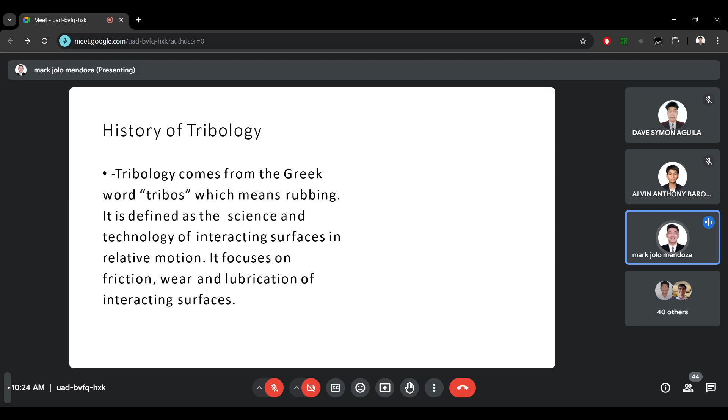First, the history of tribology. It comes from the Greek word tribos, which means rubbing, and this is defined as the science and technology of interacting surfaces in relative motion. Basically, tribology revolves around lubrication, because lubrication tends to ease the interacting surfaces of different machine parts or machine elements. It also focuses on friction and wear, since we are talking about interacting surfaces, or those surfaces that have contact with each other, so we are going to be giving focus on that.

So here, I'm just going to give you some hints. You need to remember at least five persons that are going to be discussed here in the history, so that you can easily have points on the midterm examination. Just take note of that.

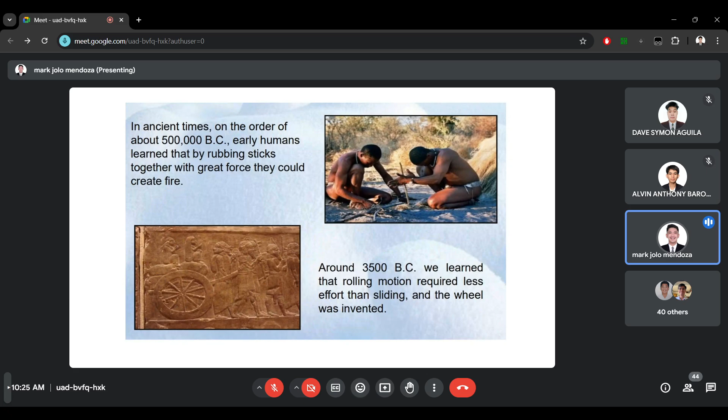For the history, we are all familiar that early humans were rubbing sticks together, and with that they could create fire. Then around 3500 BC, the wheel was invented, because they had learned that rolling motion required less effort than sliding, since there is a lesser surface in contact with another surface. That's the reason why rolling required less effort than sliding—it's easier to move or create motion through rolling rather than sliding.

Next, in 1495, Leonardo formulated the two basic laws of friction, wherein it is independent of contact area and proportional to load. But during that time, he was not credited for his work since he did not publish any of his observations, until Guillaume Amontons rediscovered these laws. According to him, friction was primarily the result of work done to lift one surface over the roughness of the other, thus resulting in deformation and wear of the surfaces.

And Isaac Newton added that moving friction was not dependent on speed or velocity, thus formulating the third law of friction. So, all of this remained in the macro scale.

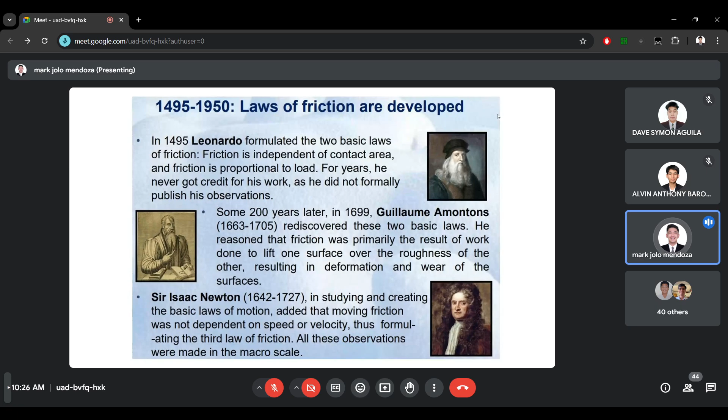Then in 1950, Phillip Bowden and David Tabor gave a physical explanation for the observed laws of friction. It was found that the area of contact is a very small percentage of the apparent area. As the normal force increases, more asperities come into contact and the average area of each asperity contact grows. This becomes the foundation of the formula of friction we use today.

Is anyone from the section able to answer? Does anyone know the formula of friction? This has already been discussed with you. So, anyone, what's the formula for friction that we commonly use for the frictional force? Anyone?

Yes, engineer. Sir, coefficient of friction times normal force po. Yeah, that's right, thank you.

So the frictional force F is equal to the coefficient of friction times the normal force. Like what was found out by Bowden and Tabor, when we increase the normal force, the frictional force would also increase.

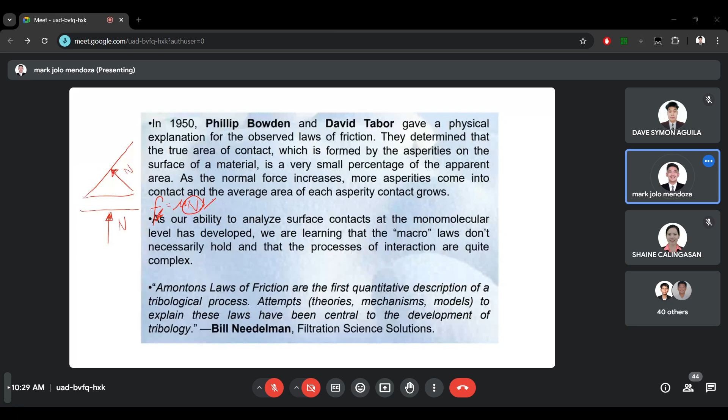In 1883, the elucidation of hydrodynamic lubrication began in England with testing done by Beauchamp Tower. We are going to be tackling more about hydrodynamic and hydrostatic lubrication after our midterm examination.

I just want to give you a heads up, even though the formulas that we're going to be using in calculating or designing lubrication systems are quite long, I could tell you it is quite easy as well because you are just going to be doing simple substitution. If you already established the given parameters, you could easily solve or design the lubrication system.

And lastly, in his final phase of research, he drilled an oil feed hole in the bearing. The oil was found to rise upwards in the feed hole and leak over the top of the bearing cap. He then installed a pressure gauge and found it to be inadequate for measuring the high pressure levels. This result proved the existence of a fluid film that could carry significant loads, which would be discussed mostly.

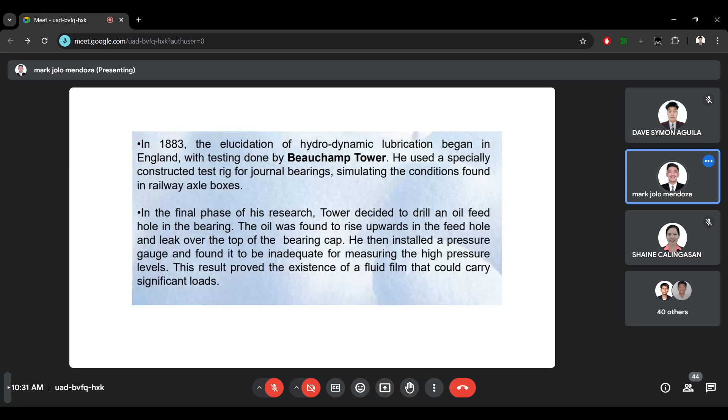Then in 1886, Osborne Reynolds published a differential equation describing the pressure buildup of the oil in the narrow converging gap between journal bearing surfaces. It was so complex that many years passed before it was solved for journal bearings.

Then Richard Stribeck published the Stribeck curve, a plot of friction as it relates to viscosity, speed, and load. After the work of Tower and Reynolds, Arnold Sommerfeld refined the work into a formal theory of hydrodynamic lubrication. So we are going to be discussing the Sommerfeld number, the Stribeck curve, and the Reynolds number on topic 4, in determining the design parameters or the performance variables of bearings. So yeah, hold on for a moment.

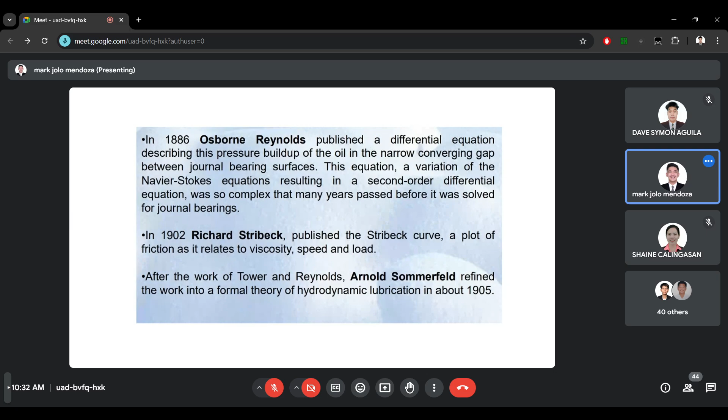So next, that's the history. That is some of the notable findings regarding tribology. So next, we are going to be discussing friction.

I am confident that you already know the idea of friction, which is the force that hinders or resists the relative motion of two contacting bodies. So basically, friction occurs when there are two surfaces that are in contact with each other.

Unless stated otherwise, the surface is assumed to be a smooth surface with no friction on the surfaces. But in real life applications, there is no such thing as a frictionless surface. But for the analysis and calculations, some problems state to neglect friction and assume that the surfaces are smooth.

So it originates from complex molecular and mechanical interactions between contacting surfaces. Friction causes wear and generates heat, which can lead to premature failure of the functioning implants.

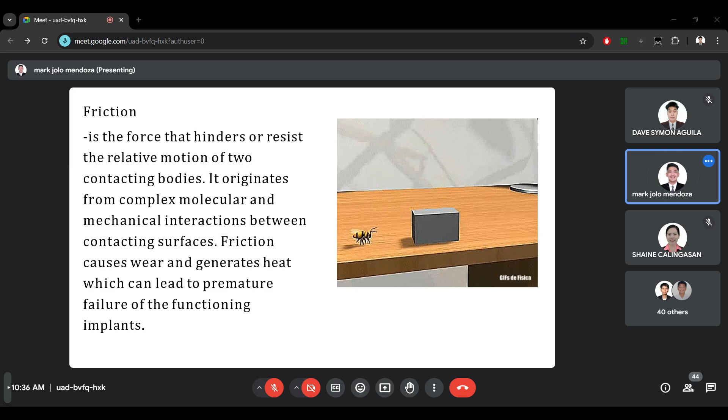So, like what has been stated by one of our masters here, friction is commonly represented by the coefficient of friction, assigned as mu. The coefficient of friction is a unitless ratio.

So we're here with our stated equation. F represents the frictional force, and it is equal to the coefficient of static friction times the normal load or the normal force N, or here it is assigned as P.

So it just depends, this one and this one are the same. It just depends on how you assign variables to the parameters given. But basically, we commonly use N since it is a normal force. So we assign normal force usually as N, and letter P usually is assigned to applied force. But again, it really depends on how you assign variables to the parameters, as long as you state that in your assumptions or in your analysis, then it would be good.

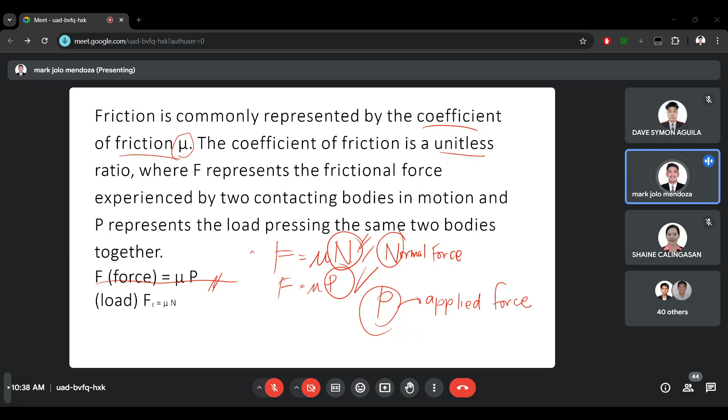So next we're going to be discussing static friction. It is the friction present between two or more objects that are not moving with respect to each other. Basically, it says static, meaning an object is at rest, or it is not moving relative to each other.

Since it is not yet moving, since it is not still in motion, then it would require a greater force to move the object, and also the static friction, or the magnitude of the static friction, is greater due to the greater value of its coefficient. So it just means that when it is stationary, if you want to move that stationary object, you would need to exert a greater force because of a higher static friction.

So the equation to represent that is given by the static force equals its coefficient times the normal force. Whereas for the kinetic friction, opposite of the static friction, it is the friction present between two or more objects that are already in motion.

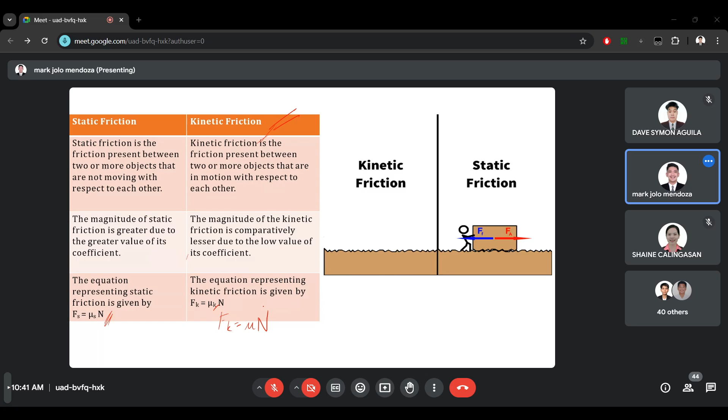Other examples are rolling friction. From the word itself, rolling, it rolls on the surface, and this friction occurs between the surface in contact with the rolling object and the surface. Its coefficient is dependent on the radius of the rolling object, the depth to which the object can sink, and the toughness of the surface.

So its formula is still the same. It's just that it is expressed through the rolling friction. So rolling friction is equal to the coefficient times the normal force.

And lastly, the sliding friction, it takes place when two surfaces are rubbed against each other. So also from the word itself, sliding, it means two objects are sliding past each other. One common example of this are those elements or machine parts that have shearing stress, wherein, for example, one plate and this plate are sliding past each other. There would be this sliding friction, and there would also be a shear stress present.

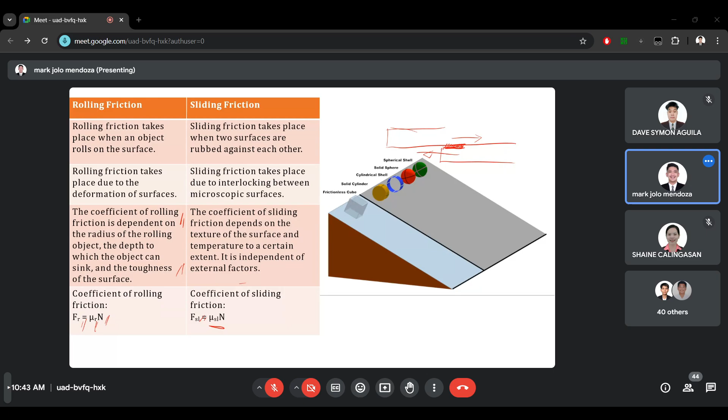So wear, you're already familiar with this, it is a process of removal of material from one or both solid surfaces in solid state contact, occurring when these two solid surfaces are in sliding or rolling motion together. It is the progressive damage involving material loss which occurs on the surface of a component as a result of its motion relative to the adjacent working parts.

Again, you're already familiar with wear, it occurs when there are two contacting surfaces that are sliding or rolling past each other. One great example of this is when you are sanding using a sandpaper, which is a rough surface. For example, you are sanding a wood or plywood. It creates a smoother surface, but there is material loss present because the surface is becoming worn out.

Also great examples of this are the chain and sprocket, and bearing and shaft. During the process, it would create wear since the shaft is rotating and being guided by the bearing. They have these contacting surfaces, so it creates wear, and if not designed properly, it could cause failure of the members of the machine parts.

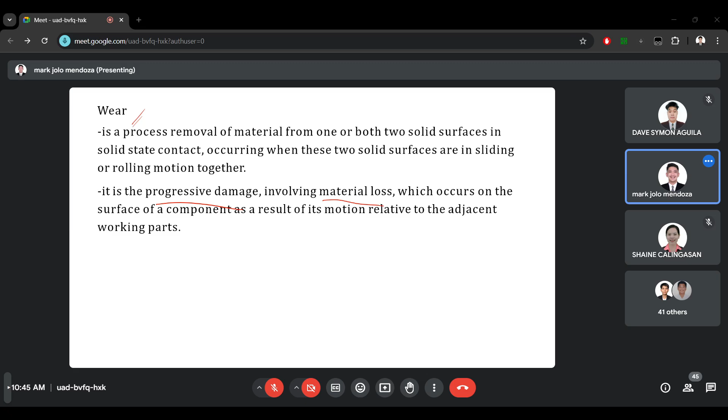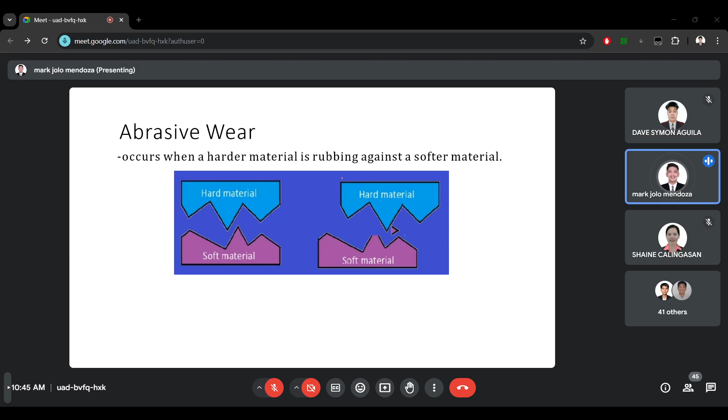An example or one type of wear is abrasive wear. It involves abrasion, wherein it occurs when a harder material is rubbing against a softer material.

Next is erosive wear, wherein it is the impingement of solid particles or small drops of liquid or gas on a solid surface that causes wear. One great example of this is dropping a hard or rough stone on a smooth table surface. When it gets dropped, you could see there is a deformation on the surface of the table, and that occurs because the surface of the table now has wear.

Also an example of this is when you drop a hot substance on a styrofoam. You could see that this part where the hot material is being dropped gets eroded. It quite dissolves the part where the hot material is being poured into.

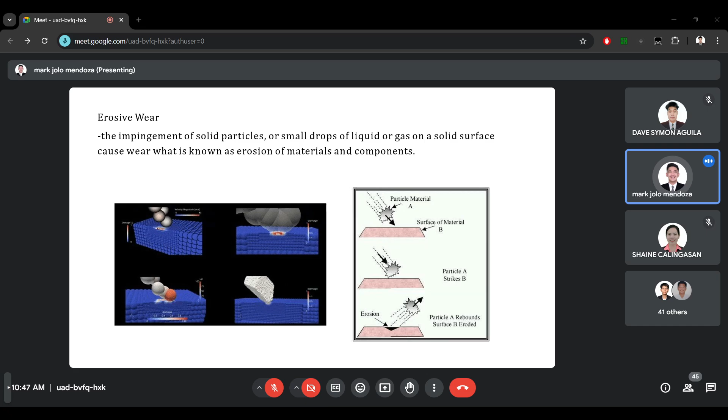And next is the frictional wear, or the adhesive wear. Again, from the word itself, adhesive, there is an adhesion where it means there would be a transfer of material, like what you can see here. When they slide past each other or get pressed into each other, it would cause a material transfer. Most of the time, these two surfaces combine with each other when they get slid past or pressed into each other.

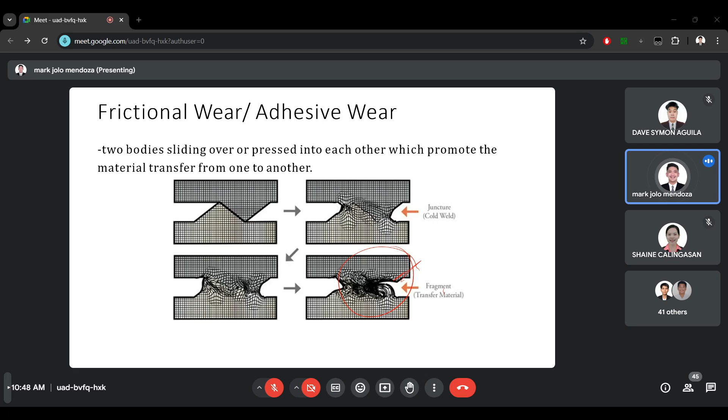So yeah, that's it. According to Confucius, the gem cannot be polished without friction, nor man without trials. So those were the terms and ideas regarding friction and wear.

Do you have any questions regarding those? Is it too fast? Do you have any questions regarding those? None. How about the others? None, sir.

Okay, so if that's the case, then I'm going to present some sample problems involving friction, and I want you to understand this since it will also be part of your midterm examination. So you need to really master and understand the idea of friction.

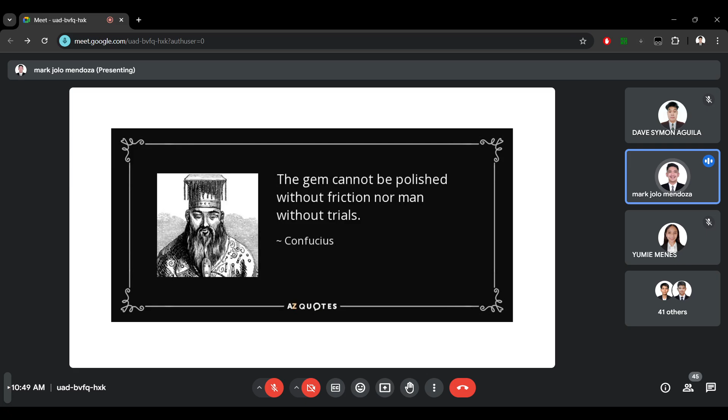So here, sample problem one. A 400-pound block is resting on a rough horizontal surface for which the coefficient of friction is 0.4. Determine the force P required to cause motion to impend if applied to the block horizontally, or downward at 30 degrees with the horizontal.

For the analysis of this, like what you've done in your previous courses, we need first to establish the given parameters on the problem. So here, the given is — let's just assume the weight of the block given is 400 pound-force, and the coefficient of friction is 0.4. That's our given.

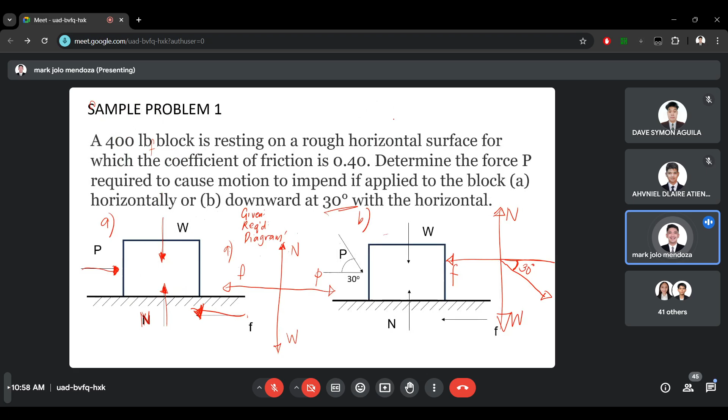For letter B, we're going to be doing the same, analyzing the forces on each component. So again, forces in y equals 0. Going upward is the normal force, then going downward is the weight. And as you can see on the diagram, let's redraw it here: 30 degrees, normal force, weight, and this is the friction.

The applied force P has an x and y component here. So if we look at the triangle, 30 degrees, this is the x component, this is the y component, this is your applied force P. Since we're analyzing the y component, and this is opposite the angle, our y component is sine 30, since opposite over hypotenuse. So y over P, y is equal to the applied force times sine 30.

Since it's going down, it's negative P sine 30. So getting the normal force, we have normal force equals weight plus P sine 30, which is equivalent to 400 plus P sine 30. So we still have two unknown variables here, the normal force and the applied force. We still need another equation, another relationship, by finding another equation.

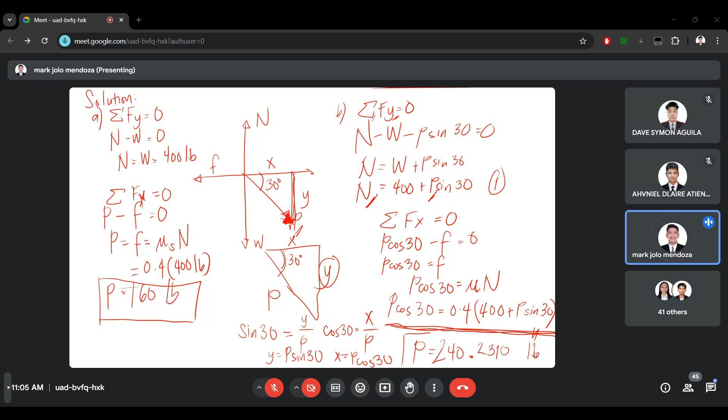For example, you found the normal force N, and for example the value is 100.278273654. You could just assign, for example, store it to letter A on your calculator.

You could just put, I would allow it, you could just put A beside that normal force, then circle it. Then when you use that one on the next calculation, you could just, for example here on getting the static friction, it's equal to the coefficient of friction times the normal force.

You could just, I would allow you to use, for example, that the static friction is 0.4 times A since you stored that value on letter A. Did you get it?

Yes po, sir. Thank you po. Yes. Yeah, but then again, that is only allowed on my class. Okay, you do not need, you should not do that on your other classes, especially on other design and calculation subjects. Yes, engineer.

Engineer De Castro, I think you have, or napindot, yes? Napindot lang po. Okay, so do you still have any questions regarding this?

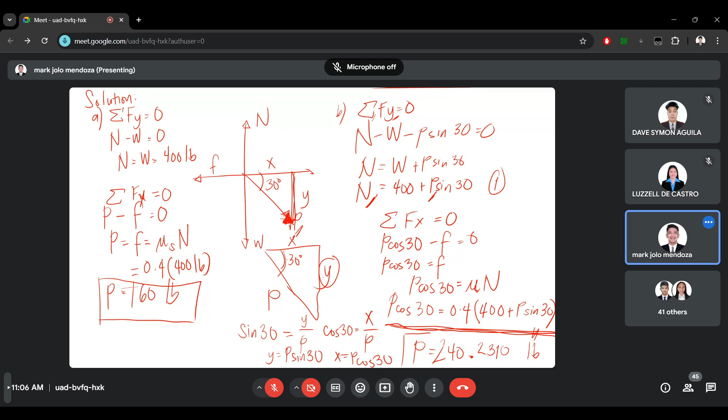Okay, so last problem. Here is your calculation solution. A block of mass m, which is 10 kilograms, is sitting on a surface inclined at an angle of 45 degrees, given that the coefficient of static friction is 0.5 between the block and the surface. What is the minimum force necessary to prevent slipping? And what is the maximum force F that can be exerted without causing the block to slip?

So again, for the analysis of this, we need to establish the given parameters first. Given is the mass m, capital M, 10 kilograms, the angle of inclination of 45 degrees, then the coefficient of static friction is 0.5.

Then we are required to find, letter A is the minimum force, F, let's assign this as F min. Then for letter B, maximum force, we are required to find the maximum force to prevent slipping.

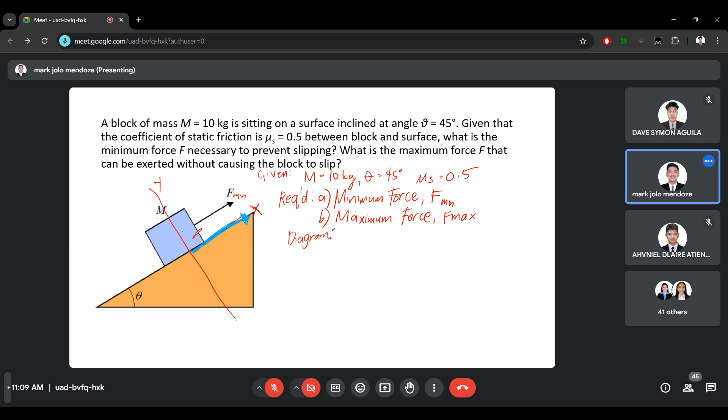Then the weight of the object is going downward, which is here. It always goes downward, with respect to the ground, which is why it's represented still as a straight force going downward.

What else? Since we are asked for the minimum force for our analysis, for the force to be at minimum, or the applied force to be at minimum, we need to analyze this where the frictional force is also going to the right. So the frictional force is always also going to the right, for us to compute the minimum force needed.

So here it's the F, the frictional force, and what else is missing here? The normal force. Again, the normal force is perpendicular to the surface, so if your surface is inclined, your normal force is going here, perpendicular to the surface it's in. And now we're good.

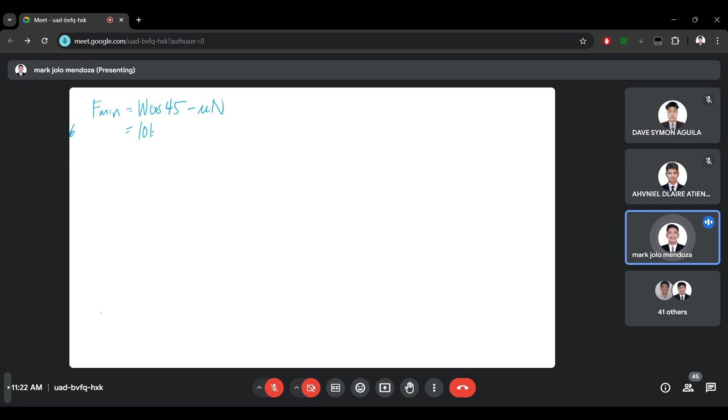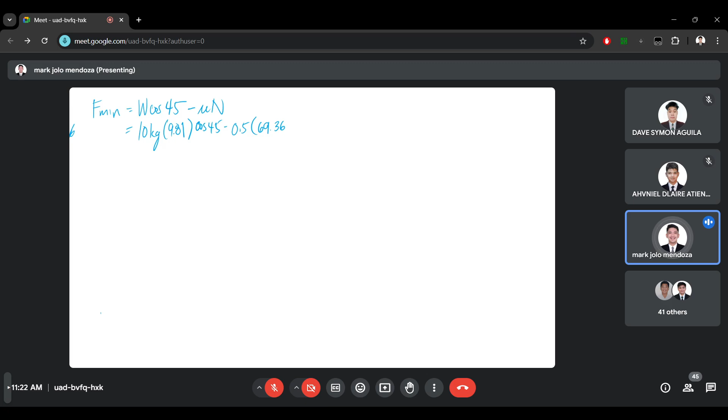So that we could... yeah, so let's just continue here. So from the previous one, it's F min equals weight cosine 45 minus mu n. So weight is 10 kilograms, 9.81, cosine 45 minus 0.5 times 69.3671. Did I remember it right?

So yeah, what is our minimum force? What is the value of our minimum force needed? 34? 34.6836. And yeah, that is our minimum force.

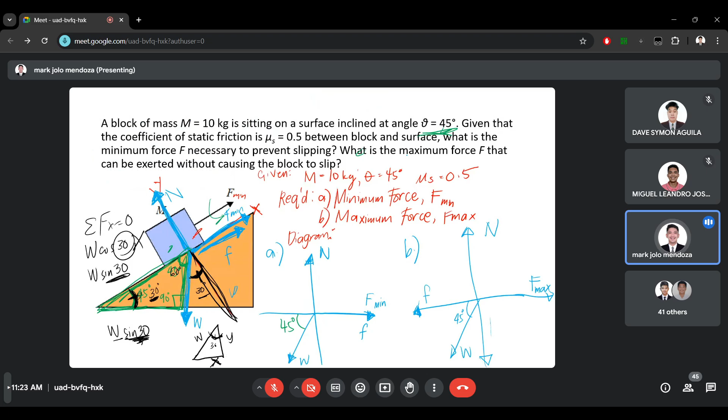Then to evaluate the maximum force, letter B, maximum force. So we need again to have the summation of forces X, which is from the second diagram, it's F max, then going to the left is the frictional force, then weight is going to the left as well, it's the X component, so it's minus weight cosine 45 equals 0, then F max equals F plus weight cosine 45, then it's mu n plus mg cosine 45.

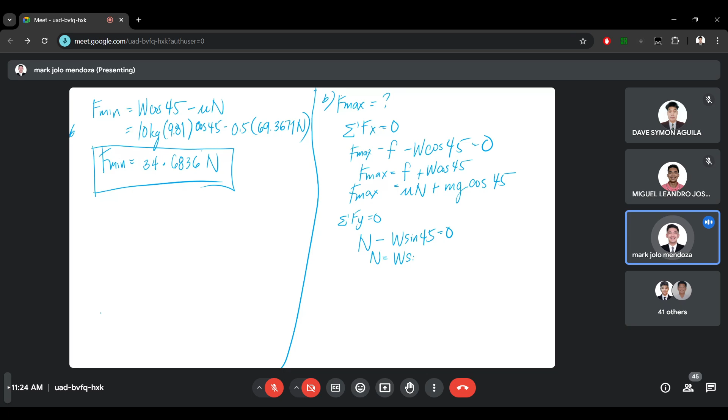And for the summation of y, so our y components are n still minus weight sine 45 equals 0. So our normal force is weight sine 45 still. And based from the previous one, we have 69.3671 Newton. So again, we already have the normal force.

We can substitute it here. So maximum force is equal to our coefficient is 0.5, normal force 69.3671 Newton, then plus 10 kilograms times 9.81 times cosine 45. So what is our maximum force needed? That is our final answer.

Okay. Did you get this? Do you have any questions regarding this? None? Wala naman po. Okay.

So I just need to check if you really understand unit systems, because I think that was another section last Tuesday. On your board work that I'm gonna be giving you, it really is the same, but I used English, I think I used English and SI unit there. So I just want to ask, how will you get a pound force when you are given pound mass?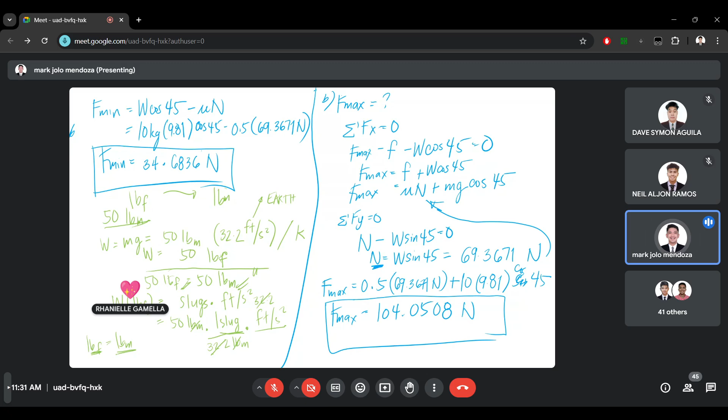Okay, did you understand? It's the same when we are analyzing weight on Earth. But if we are analyzing weight on, for example, Mars, it has a different gravitational acceleration, so it will not be the same. It will not be the same analysis when we talk about weight on Mars. Did you get it? Did you understand?

Yes po. Okay, kindly take note of that. I'm giving you hints, kindly take note. Do you have any questions? Wala naman po. How about the others? Do you still have any questions? Wala po, sir. None.